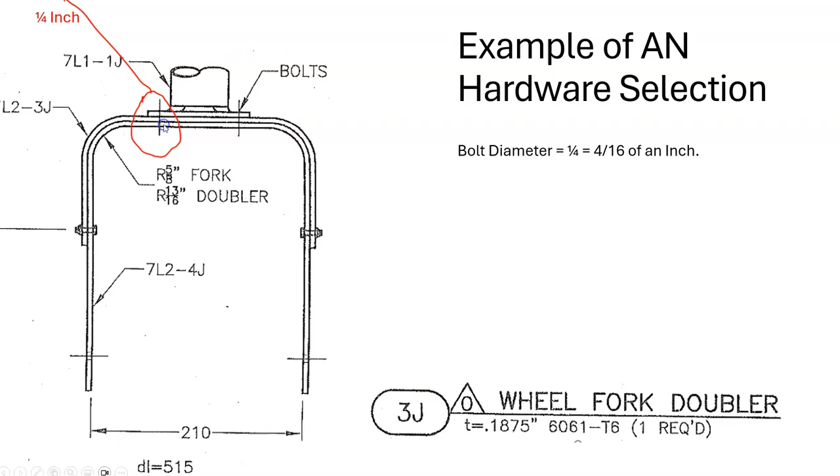The grip length, the distance from here to here - there's 3 plates, 1, 2, 3. Those 3 plates are all 0.1875 of an inch, of 6061 heat treated aluminium. So when I multiply that out, I get 0.5625 of an inch.

Generally, the grip length is in 1/8 of an inch. So if the diameter is in 1/16, the grip length is in 1/8 of an inch. So to convert 0.5625 inches to 1/8 of an inch, I'm just going to multiply it by 8. That gives me 4.5, which is the equivalent of 9/16 of an inch.

Having said that the grip length or length is normally in 1/8 of an inch, in this particular instance it's in 1/16, and we'll see that in a second. But rule of thumb, the length is in 1/8 and the diameter is in 1/16.

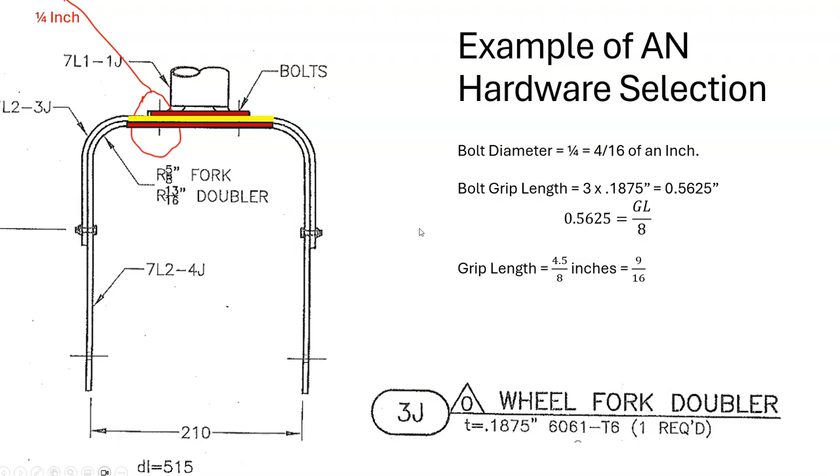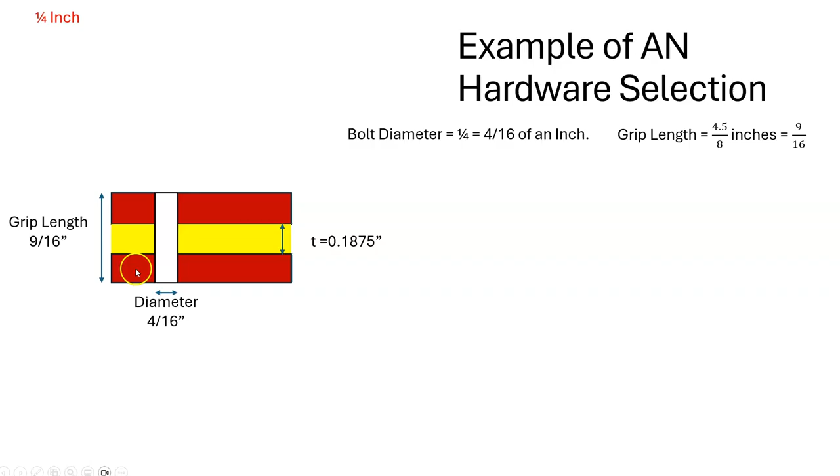Okay, so this is our situation now: with the 3 plates, with a 4/16 inch diameter and with grip length of 9/16.

So when I go to the reference charts, we have some detail here on the bolt. So we have the diameter, and I can see here the diameter is a 1/4 inch. So that's AN4 because it's 4/16. If it was a 5/16 diameter, it'd be an AN5. If it's a 6/16 or 3/8, it'd be an AN6. If it was 7/16, it'd be an AN7. Okay, so we need an AN4 bolt.

And the 28 here, this tells me the number of threads per inch. So if there was an inch of threads there, there would be 28 on it.

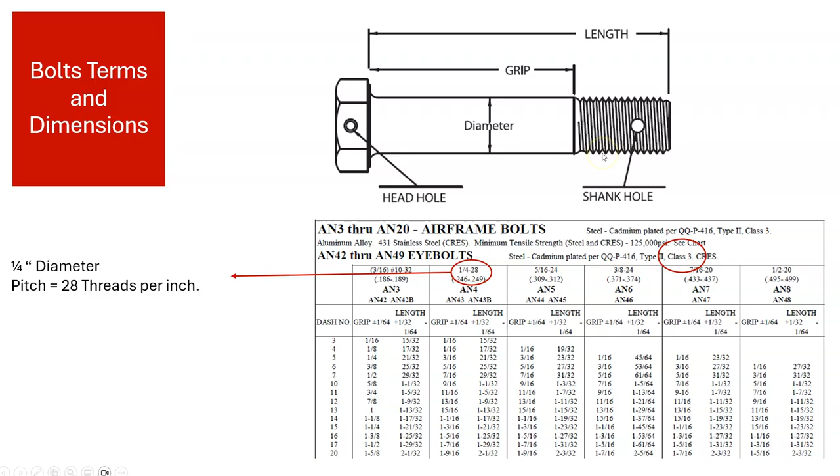The other piece of information I have here on this bolt is that it's a class 3 bolt, and that refers to the fit between the bolt and the nut or the housing that the bolt is going into. So if that's the bolt, there's our pitch lengths of our various angles. When we put it into the nut or the housing, the gap between the thread of the bolt and the thread of the nut, that gap determines the class of fit.

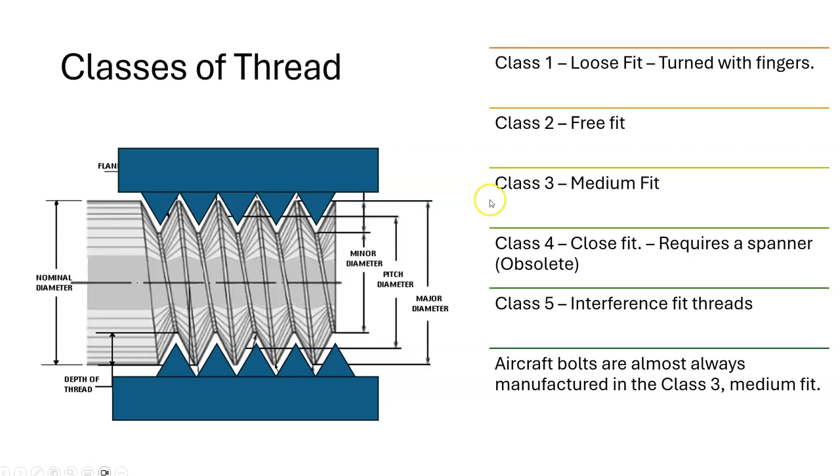So if we had a loose fit, so if there's a nice gap, it'd be class 1, medium fit class 3, and if these threads were bigger than these threads, we have an interference fit, that would be a class 5. Okay, so aircraft bolts are generally class 3, so you can't really turn them by hand. Well, you can, but they get a bit stiff, and that makes sense because they won't open as easily. So aircraft bolts are almost always class 3 fit.

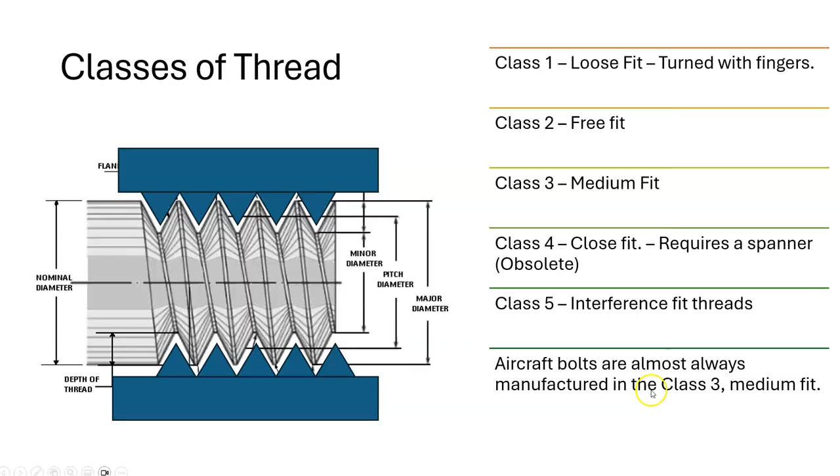The other thing regarding the bolts is whether they have a hole to allow locking wire going through it, or a hole for a split pin to go through them. So if there's a hole in the head, we put an H into the part number. Okay, so we already know our part number is an AN4.

And if we want a locking wire, it's going to be AN4H. And then if we want a hole in the shank, we don't put a letter after the last digit, and this last digit is to do with the grip length. So in our case, we're going to need an AN4H dash something, and we'll exclude the letter A.

We're also going to need a nut. There's different types of nuts. So we're going to use a castellated nut, an AN310. That will allow the split pin to go through here. And because it's a 4/16, the castle nut is going to be an AN310-4.

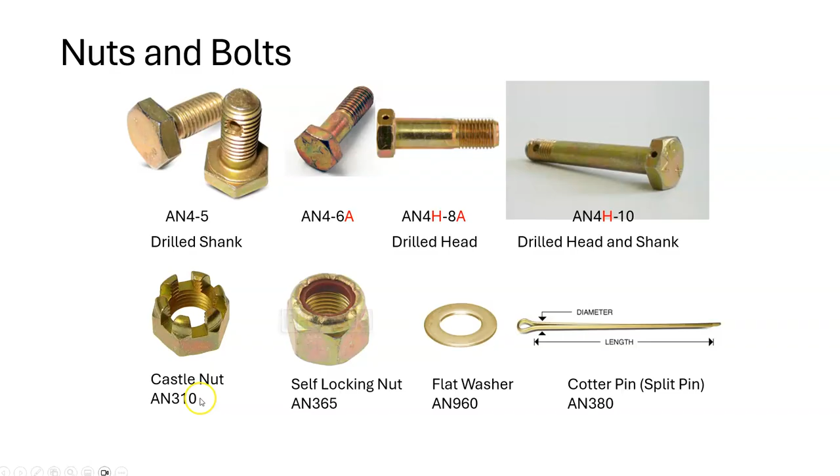Okay, so we have a castle nut, AN310-4. If I needed a nut for a 5/16, it'd be AN310-5. If I wanted for a 6/16 or 3/8, it'd be AN310-6. Okay, but we were on AN4, so it's AN310-4.

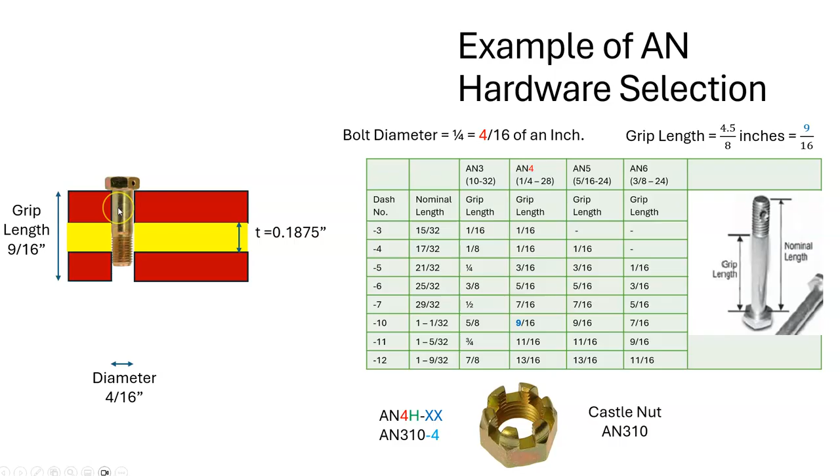Okay, so we know the diameter, it's 4/16, AN4, we know we need a hole in the head, so that's our H. Now we work out the grip length. Well, we know that the grip length, so from here to here, is 9/16. So I'm just going to get rid of that bolt and put in my own one here. So that's 9/16. So I'm going to need an AN4H-10.

Okay, I'm going to need an AN4H-10. So if I come to 4, come down to my grip length of 9/16, and then I'm going to read across the dash number.

Okay, we should put a washer, or at least one washer, on the bolt just in front of the nut, and the washers are AN960. Okay, so that's the spec AN960, and then we go along the dash numbers. So I know it's a 1/4 inch. Okay, so a 1/4 inch diameter bolt is going to need an AN960-416 washer.

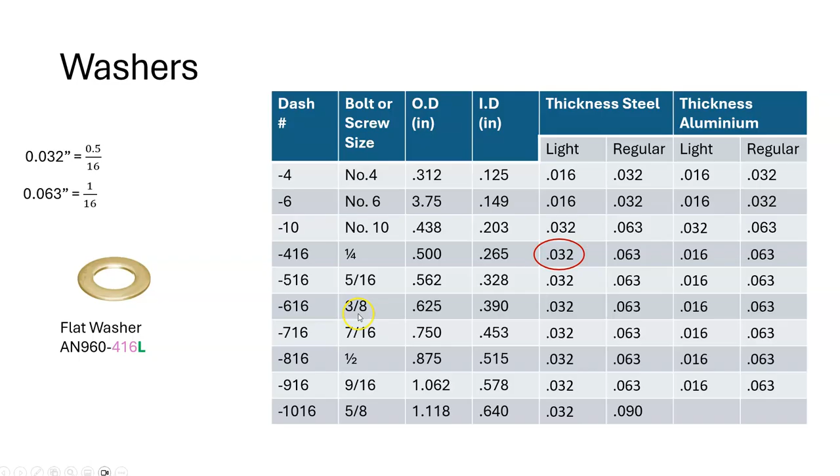And then we can have a light washer, which is 0.032 of an inch, which is 0.5/16, or a regular washer, which is 0.063 of an inch. So I'm going to go in this case for the 0.032 because our grip length is exactly the length of the bolt, grip length in the bolt. So we're going to go with a 0.032. So we're going to go for a -416L for light. Okay, a -416L for light washer.

Okay, so there's our washer, and I've made a mistake there, that should be 0.5. That's going to fit in, and we have our bolt, we have our washer, we have our nut, and the last thing then we need is our split pin.

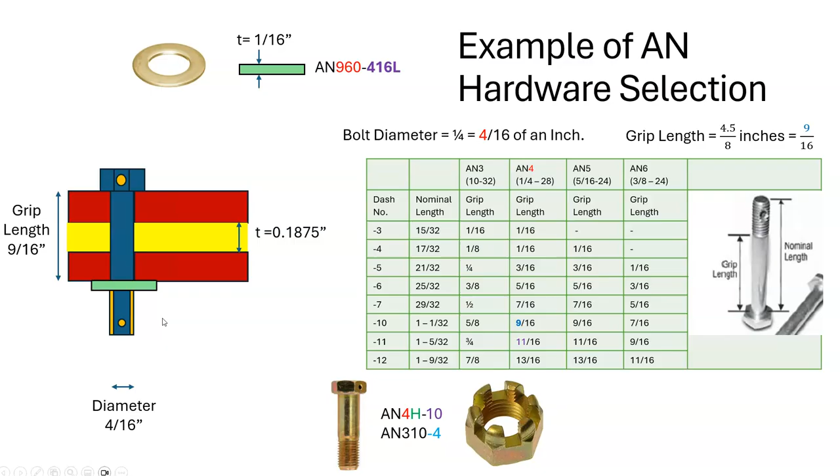Okay, so when you go to a chart, and I found this chart on the LAS Aerospace website, you come down and you find the part number of the bolt, sorry, the nut. So it was an AN310, it was an AN310-4. That's a 1/4 inch, 28 threads per inch, and it's telling me this is the cotter pin to use.

AN380-2-2. However, on the same chart, it's telling me that an AN380-2-2 has been replaced by a mil-spec 24665-132 cotter pin. So I'm going to go with this cotter pin here.

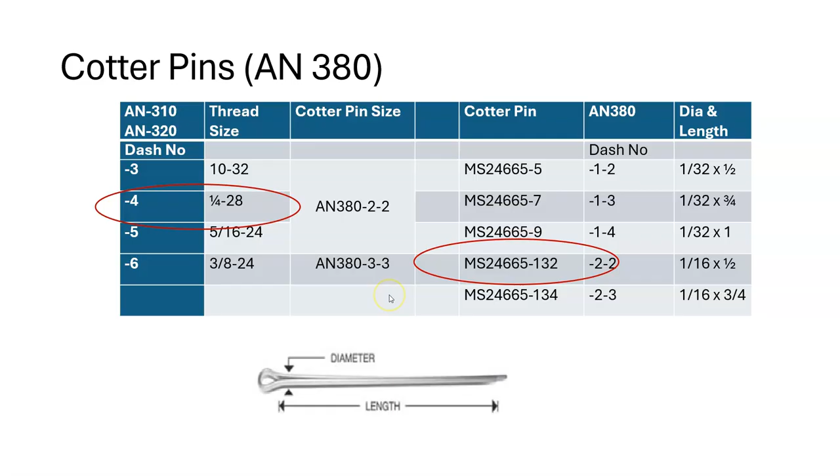So we're going to bring that back then, and now we have all the hardware. So we have an AN4H-10 bolt with an AN310-4 nut, an MS24665-132 cotter pin, and an AN960-416L washer.

All right, nearly there, but somebody's probably going to say, well, you should have a washer underneath the head as well. Well, if we were to do that, then I'll put washers in here now at this, and if you remember when I looked at the washers, one was 0.5/16, that was the light one, and then the regular was 1/16, 0.063 of an inch.

So if I go with the regular, so I'm dropping the L, and it is 1/16 in thickness. So then the length will be, there's 1/16, and there's 9/16. Okay, so I need a bolt with a grip length of 10/16, but it doesn't exist. The best I can do is 11. Okay, we get another 1/16, so that's 1. 9 is 10 plus 1 is 11. So if I go for 11 16th bolt, so our bolt now will be AN4H-11.

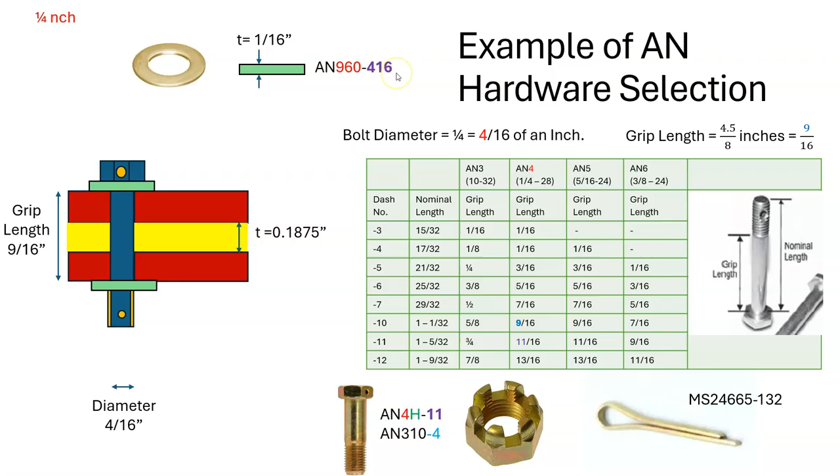The nut doesn't change, the split pin doesn't change, the washers have changed, so I've gone from the light washer to the regular washer. So I hope that was informative. Thank you.